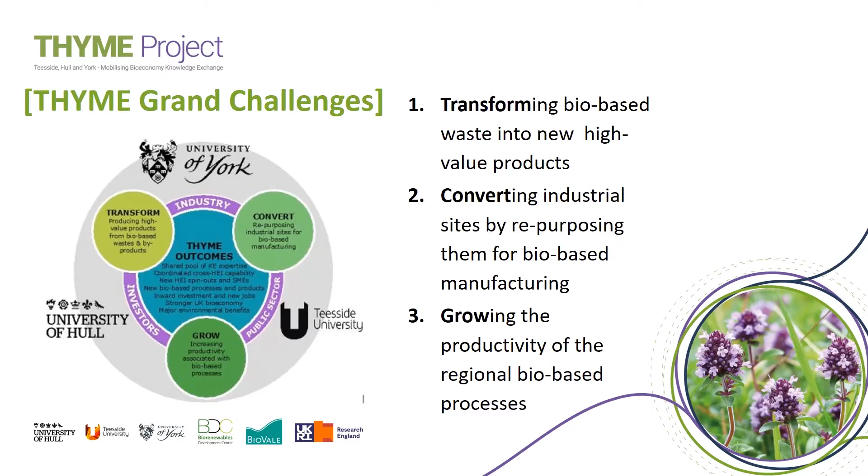And the challenges that the programme sets out to address are as follows. Challenge number one is transforming bio-based waste into new high-value products. Number two is converting industrial sites by repurposing them for bio-based manufacture. And the third one is growing the productivity of the regional bio-based processes.

So the purpose of the webinar today is primarily knowledge exchange around the topic of sustainable wastewater treatment, and hopefully with a view to develop a network around this area if there's an appetite to do so. The talks today will focus on activity at very different technology readiness levels, and you'll see as we go through, around reducing energy and resources to process wastewater, around transforming waste from the water system into valuable products, and also improving the productivity of wastewater processes.

Just a quick preview of the programme. Obviously, I'm the chair today from the University of Hull. I'll shortly be inviting Jill Mooney from Catch to give an intro into the work of Catch and different opportunities to engage with the group. And then there'll be 5 talks from across the THYME partnership. And again, you'll see as we go through, there are different technologies, different readiness levels, etc. But hopefully they'll all be engaging for you. And then right at the end, we're going to have a Q&A session.

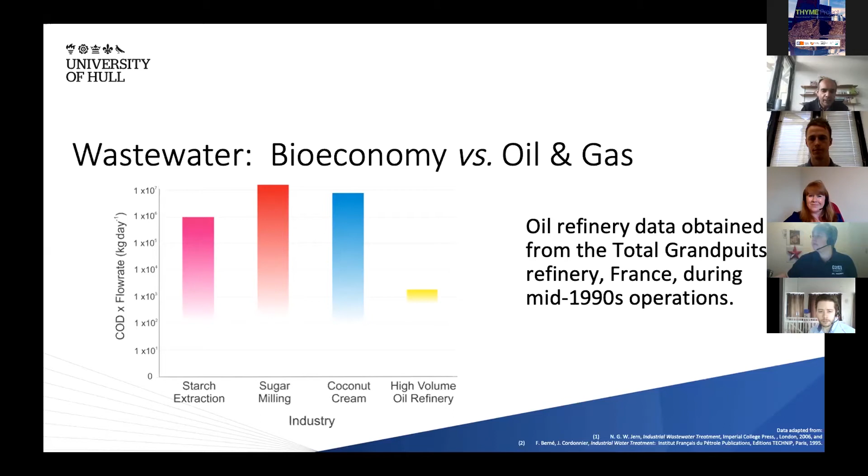So I'm going to hand you over to Adam, who's going to talk to you about Centrica Storage Ltd and potential issues that they face with their produced water. Yeah, thank you, Jay. So good morning, everyone. Just to give you a bit of background on Centrica Storage, if you haven't heard of us, we are an oil and gas operator with our head offices in Hull.

And both of these assets have to deal with wastewater. Both of them have challenges in processing that. So I think if we go to the next slide, there's a bit more, yeah.

The offshore assets were built 25 years ago, kind of old historic tech, most of it quite basic, quite simple. The produced water comes from the gas streams, which are quite hot underground. As you bring them up, they cool, and you get dropout of condensed water. These then go through a number of knockout vessels, and then finally the last stage is a filter. This filter is there basically to take any hydrocarbons or benzenes or nasties down to around 30 parts per million before the water is put back into the sea.

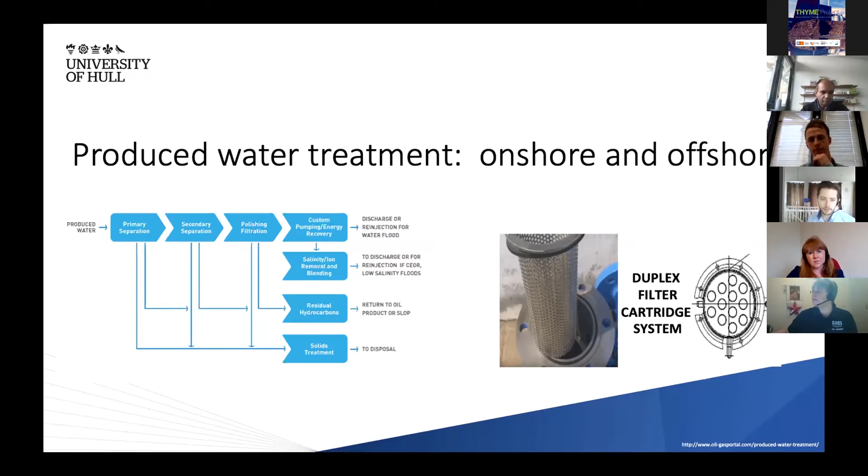Okay, so we engaged with Centrica Storage Ltd, and they explained their problem to us. They invited us to their facilities so that we could realise the scale and magnitude and identify those issues on site as well. We proposed a plan of work in which we could use some of the university's experience and expertise, particularly in the electrification of technology, to overcome some of the issues that Adam has mentioned, and develop this as part of a Knowledge Transfer Partnership, a part UK government sponsored initiative that encourages this collaboration with industry.

The KTP is a partnership between the industry partner and the university that the government helps to fund. In the case of a large organisation, 50% of the funding comes from government. In the case of a small or medium enterprise, something like 67 to 75% of the funding comes from government. The purpose of this project is to cement the collaboration through a transferable person known as the KTP associate, who happens to be a recent graduate. This graduate is supervised by both sides so that industry and academia can converge on providing a real and tangible solution to the industrial problem.

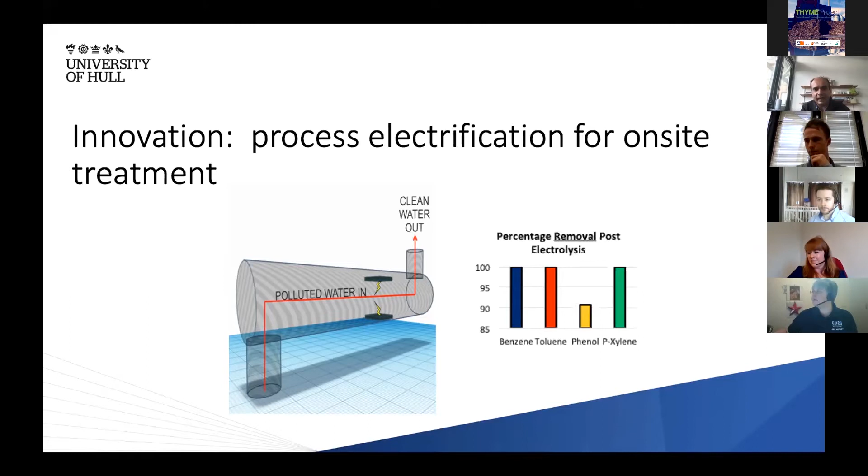And we're doing this not on the university campus, but rather at the university's Aura Innovation Centre, where Catch also have facilities. This low carbon centre allows us to have workshop facilities to do the research and testing that we need to actually develop and deliver on this particular project. So it brings the skills, knowledge and expertise needed, and it's a real benefit that it's located just a stone's throw, would you say, Adam, from your offices at Woodland House, on the same campus.

So thank you so much. Just want to say that if any of you are interested in applying for a KTP, we have an amount of expertise at the university. You can feel free to get in touch with Yosina or Tracy, or even me. We'll put you in touch with the relevant person. Thank you.

I'll pass you over to Jenny. Hi there. Thank you very much for that. I was just reflecting actually that the power of this sort of, it's not just funding, but this targeted support and the way in which it can unlock these collaborations and to answer real world problems. I think it's really exciting. And I must apologise to Reese because I referred to you as a student, and I should know better because I used to be a KTP associate myself many years ago. So no, but that's great.

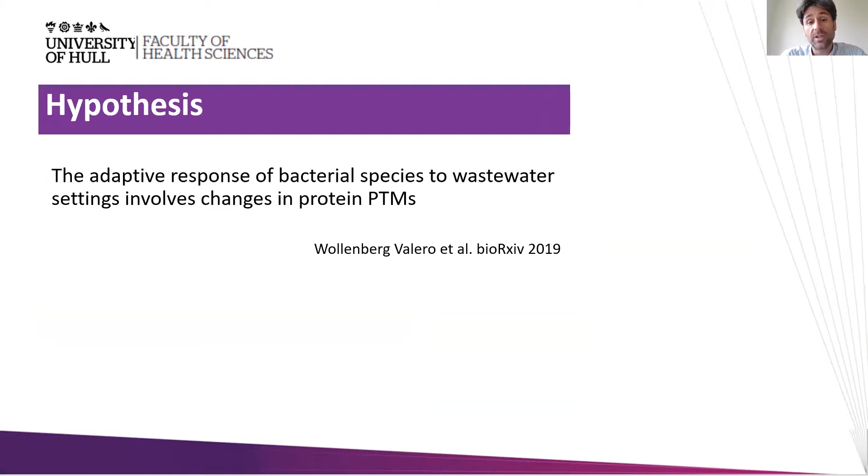So the hypothesis, which is underlying this project, is that bacterial proteins change their PTMs, change their modifications to adapt to the wastewater treatment environment. And this is based on some preliminary data that we published last year as preprint. The opportunity that we identified was to target that third THYME grand challenge that Jenny has mentioned before. And in particular, a research question is, can bacterial PTMs be useful biomarkers of wastewater treatment efficiency?

We haven't done any wet lab analysis. We haven't collected wet samples. We have used an alternative approach, which is known as proteomic data mining.

So we have used proteomic data publicly available in PRIDE, the Proteomics Identifications database. That is a database which captures all proteomics data that researchers produce, all those raw files, all those raw data, or not all, but if it's a decent study, they are deposited in these public repositories. And then we can go with a different research question and interrogate, investigate those raw data to try and answer the question that we are interested in.

And again, I've got an analogy to try and explain the methodology if you're interested, but as I said, I'm not going to explain that here because I only have 7 minutes left. But if you're interested, I can expand on that.

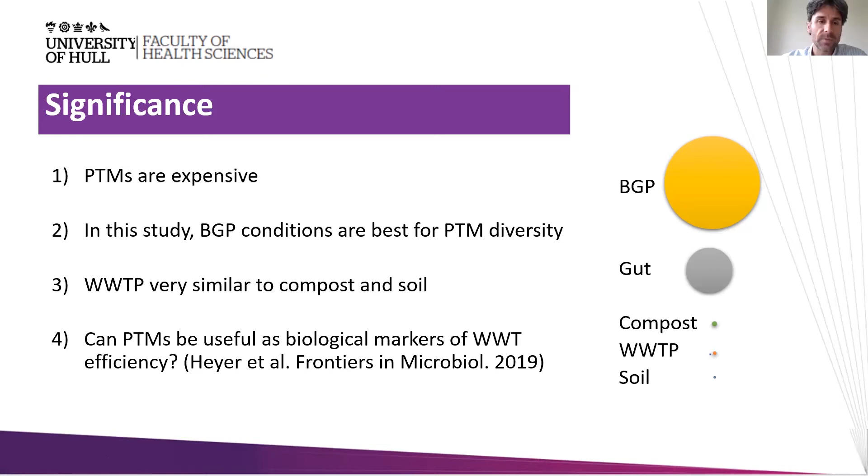We are going a step forward and proposing to use PTMs. So I hope I've convinced you that we are developing an original idea to measure wastewater treatment efficiency based on those PTMs. It is good value for money in the sense that we had a small grant, only £2,000, and we have generated gigas of data using proteomic data mining.

And we want to develop that into NERC and BBSRC grant applications to understand if these PTMs can be the biomarkers of those wastewater treatment plants that we are looking for. So I'm going to stop there.

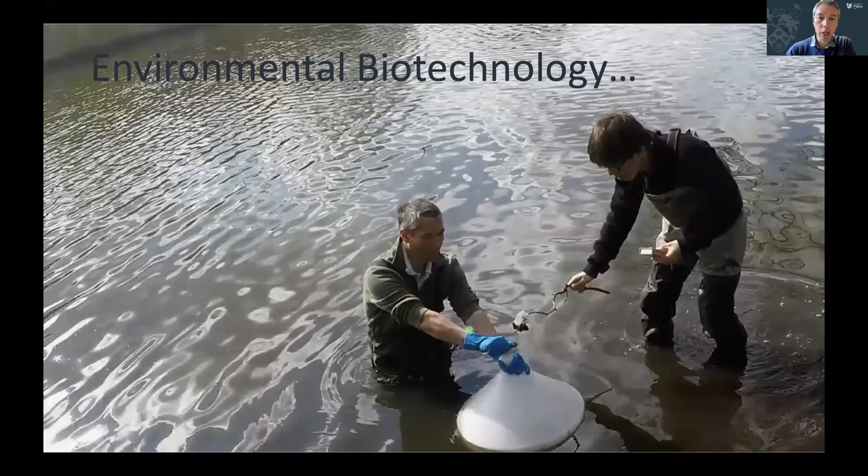So as Jenny said, I'm going to cover a couple of projects that THYME has supported that I've been involved with. Okay, so this is the process that we're interested in, the production of biogas from organic waste. That's a microbially based process. Basically it takes long molecules, they're broken down by different parts of the microbial community into smaller molecules, which ultimately result in the generation of biogas, which is a mixture of methane and carbon dioxide. Generally, just over half of it's methane and most of the balance is carbon dioxide.

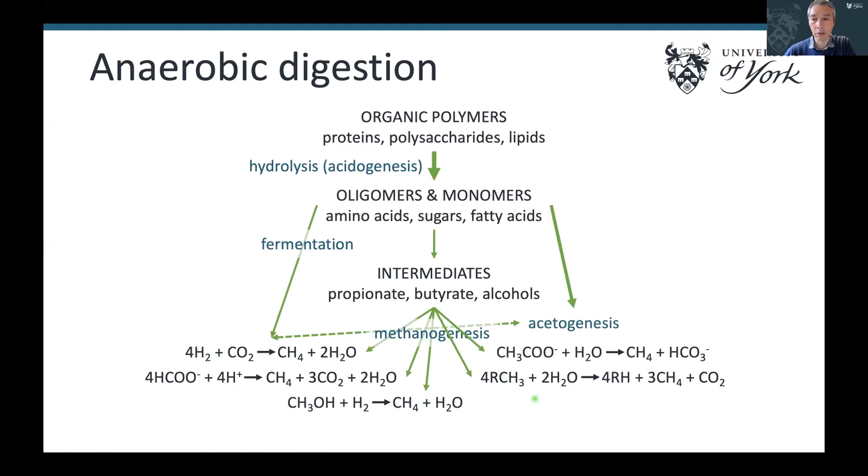And there's some interesting unique biochemistry that goes on by a group of microorganisms called methanogens, which can use a variety of interesting pathways to make methane. Okay, and we can harness that process, and we do harness that process in domestic wastewater treatment.

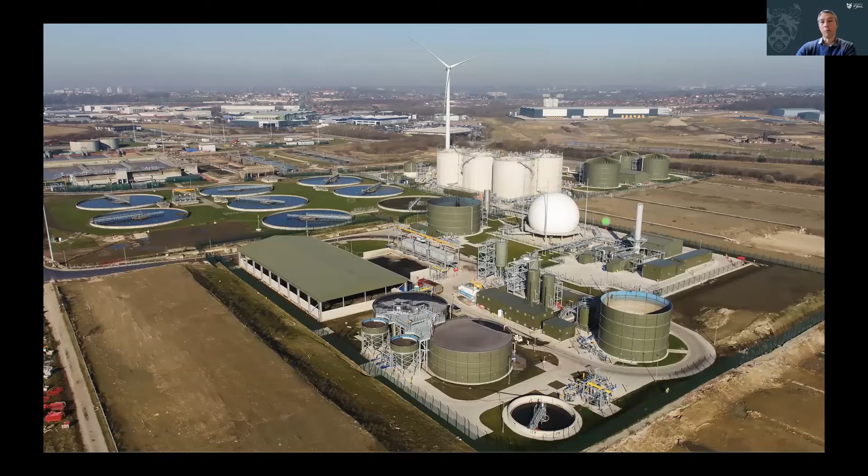So here you can see an overview of Yorkshire Water's Knostrop site, and in the background, these 4 white tanks are used for anaerobic digestion at a scale of 7.5 million litres per tank to produce biogas, which is then collected into this bubble and used for running a combined heat and power engine, so both producing electricity and heat.

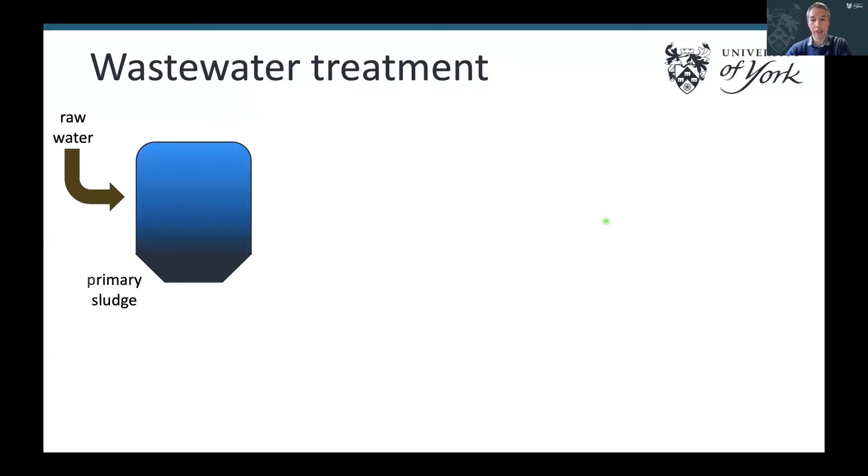Okay, so for those of you that are not aficionados of domestic wastewater treatment, the way this works is the water comes onto site, it goes into a settlement tank where the primary solids are allowed to settle out. That dirty water is then decanted into a second tank, which is aerated. That also removes a lot of the organics using an aerobic microbiology process, and those microbes form biomass which can also settle out, and they form what's called a secondary sludge.

Just as an aside, the air that we blow into those systems uses 1% of all the electricity that's consumed in the UK, so this is a fairly energy intensive process. The clean water from this process is decanted again into a trickle bed filter, more microbes involved at this point to really polish that water and get rid of any straggling organic molecules that can be removed.

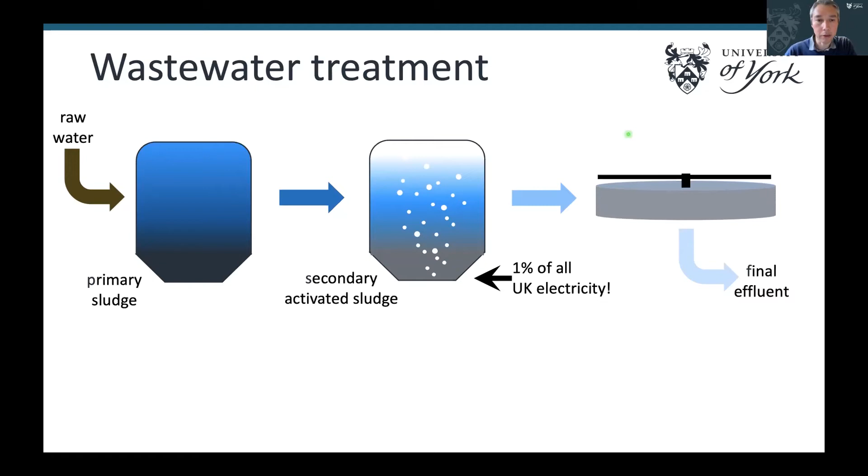And then the water that remains, the final effluent, is decanted out, normally into the river discharge. And that water is cleaner than the water that is abstracted upstream to make drinking water in the first process. So both the primary sludge and secondary activated sludge are collected, and they're put into an anaerobic digester, which is the main interest in my group. This also contains a microbial community that produces biogas and a digestate, which is nitrogen rich and can be used potentially as a fertilizer.

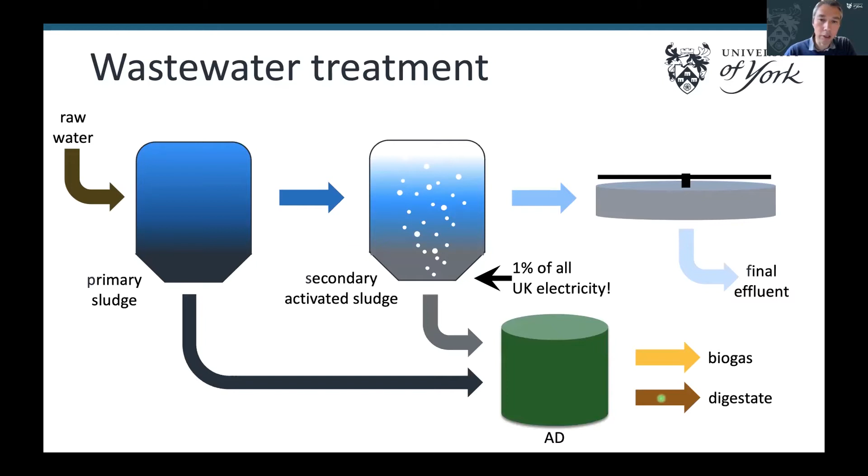Okay, so in order to understand this biology, we have collected a number of samples from around the Yorkshire region, going to Yorkshire Water sites. We've used DNA sequencing rather than looking at proteins, as Pedro was talking about, or PTMs.

And based on DNA sequencing, we can see that there's a large variation in the number of organisms that are found within anaerobic digesters. The population within the digesters is different to the population that's found in the material going into the digesters, and the digesters themselves vary depending on how the material is treated before it goes into the digester.

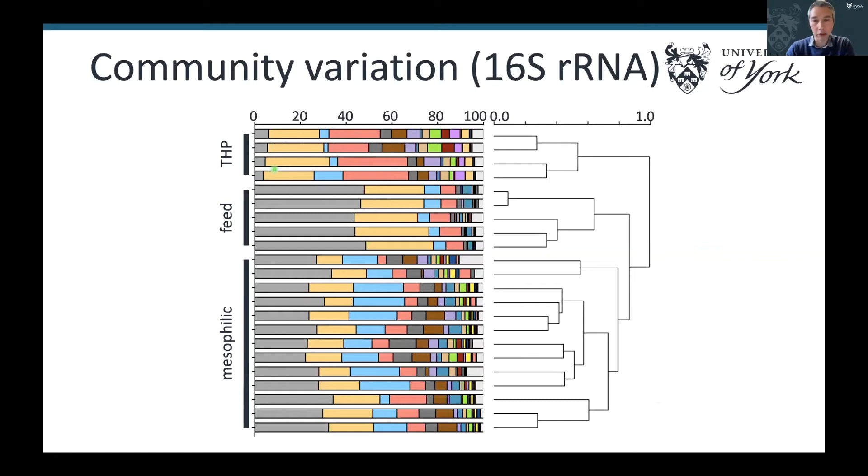So the first project that we were involved with that has had THYME support is led by Caroline Orr at the University of Teesside, and involves her collaborator Helen Carney. It also involved the Biorenewables Development Centre, which is based in York, and industrial partners, Northumbrian Water, who were interested in whether we could use these molecular techniques to improve the efficiency of their AD processes.

So basically, the proposal was Northumbrian Water run 2 anaerobic digestion sites, one at Bran Sands and one at Howdon. Their material is heat treated before it goes into the anaerobic digesters, and the reason for doing that is to try and break down particularly the microbes in the secondary sludge, which tend to be rather difficult to access for anaerobic digestion.

So Caroline proposed that Northumbrian take samples of the material coming into the sites, the material after it was heat treated by the Cambi process, and then from the 3 digesters that were receiving that material. And those samples were taken once a month over 5 months in the summer of 2019 from both sites. And the reason for looking at both sites is because they perform differently, even though theoretically they're running exactly the same process.

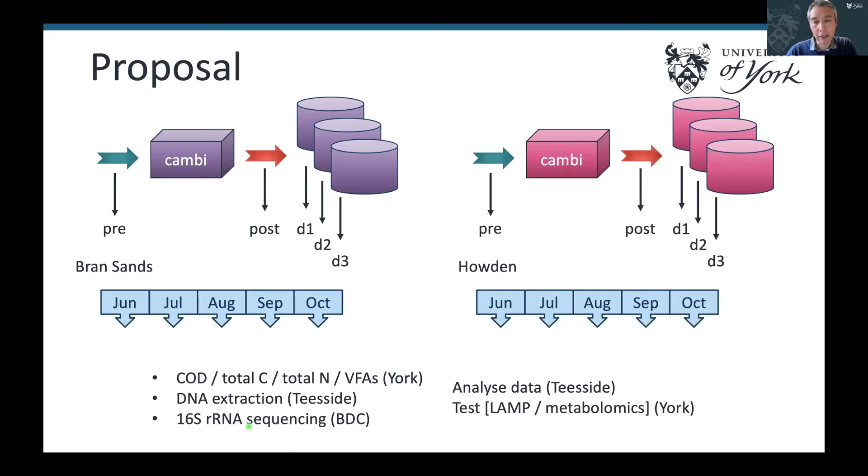Okay, so the samples were all collected very successfully and distributed, and then before they were completely analysed, coronavirus hit. So we're not at the end of this project quite yet. We're still analysing some of the data, but I can give you a brief taster of the kind of things that we've managed to collect so far.

One of the other technologies that we're looking at is an assay that we developed for another project. This is a LAMP assay, so a very rapid, potentially colorimetric assay that tells us about the specific presence and absence of particular species within any sample, but in our case, within anaerobic digesters.

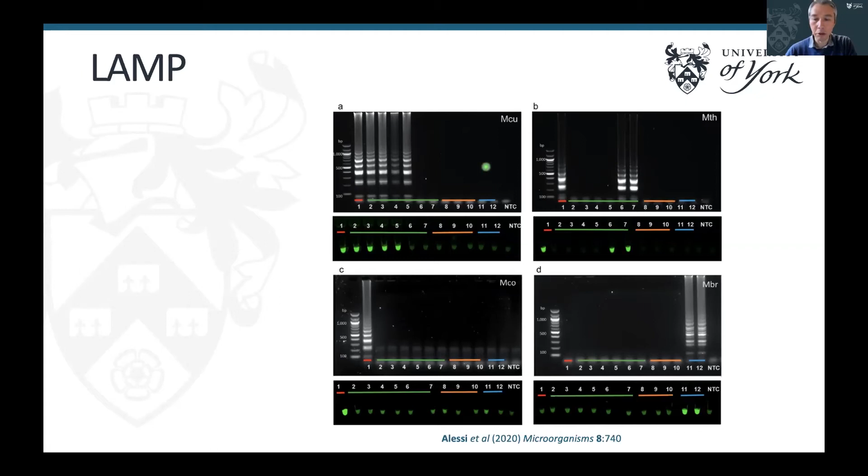We had developed this to follow specifically the methane-producing organisms in another project that we ran with the University of Southampton, which is to do with biogas upgrading. I can't go into details here, but basically the idea is that you can take renewable electricity, use that to make hydrogen, which is very difficult to store,

but then feed the hydrogen into digesters, and the microbes will adjust to that and combine the carbon dioxide and hydrogen that you're injecting to make methane. So instead of getting the typical 55 to 60% methane, you end up with 95% or better methane coming out of the system.

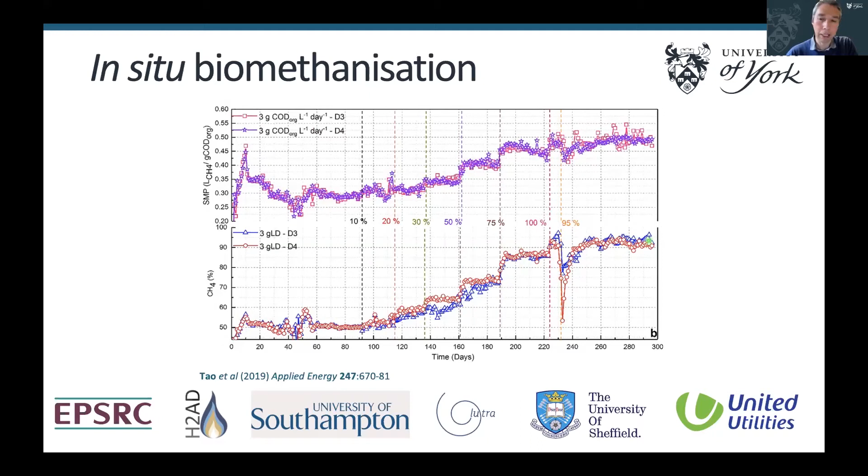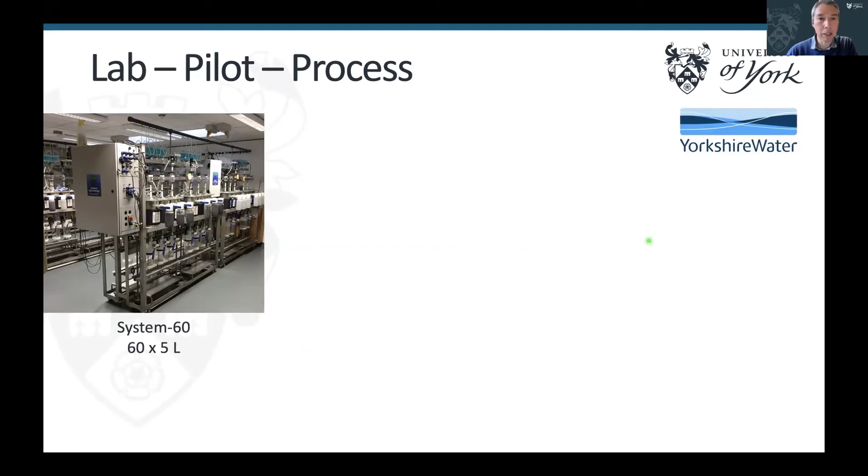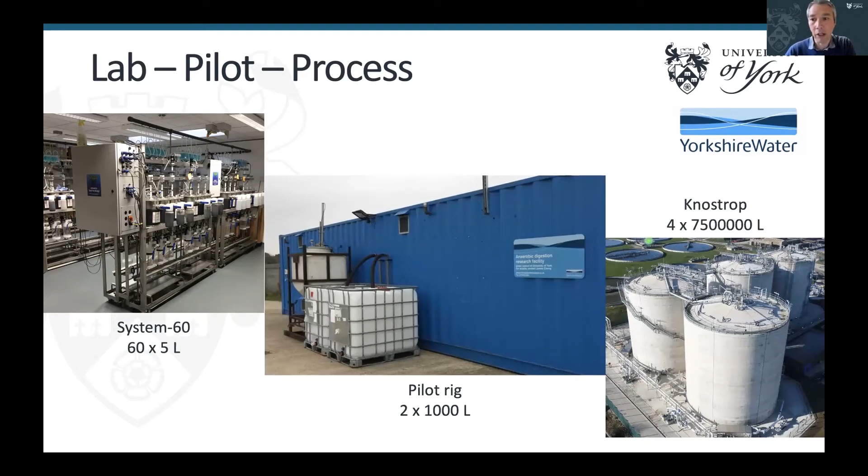Right, so doing those projects highlighted a challenge to us, which is we do most of our experiments in the lab, and this is the facilities at the University of York, which have been sponsored by Yorkshire Water. We have 60 5-litre digesters where we can do experiments. Yorkshire Water also have a pilot rig, which allows us to scale up from 5 litres to 1,000 litres. But obviously there's still an enormous step getting up to process scale, which, you know, in Yorkshire Water's largest installations is 7.5 million litres.

So the second project that we have been involved with, sponsored by THYME, is to look at this idea of repurposing process scale assets to demonstrate AD innovations. This was done in collaboration with Peter Ball, who's a colleague in the management school at the University of York, Gary Montague at Teesside, Tom Taylor at Yorkshire Water, and actually most of the work was done by Nathan Innard, who worked for me at the University of York.

So the idea here is that as Yorkshire Water is updating its sites and rationalising processes, it's going to close some of its smaller AD sites. Normally those facilities would be decommissioned, and the question was whether any of those facilities would be suitable for demonstrating innovation, which would allow us to bridge the gap between pilot and process scale without any of the risk of just asking someone to make a change that looks like it works at small scale into a process plant, which obviously, you know, nobody wants to be responsible for losing sewage treatment facilities, for example, at Sheffield or somewhere else. It would not make us very popular.

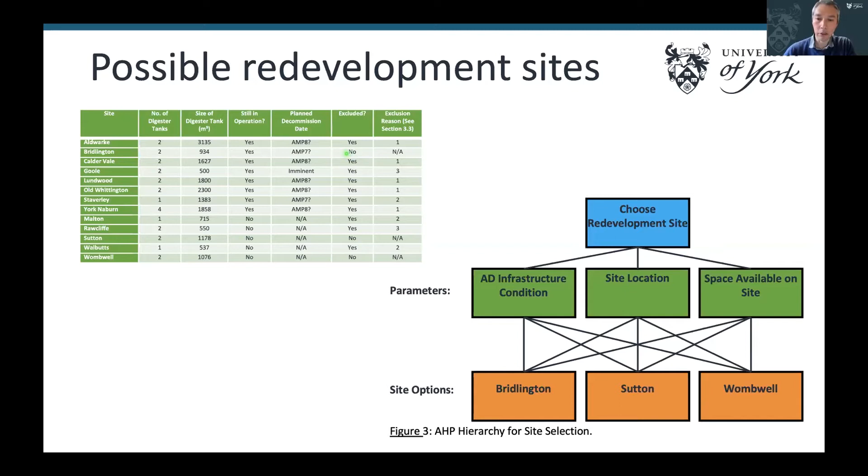Okay, so Nathan conducted a survey of potential assets that were being closed down. We applied a number of different criteria to work out which sites might be suitable based on the current state of repair of some of those assets, whether or not there were 2 or more digester tanks available so that we could do controlled experiments and actually demonstrate that our innovations were improving the process. And we basically narrowed it down to 3 potential sites, and then did some further work which allowed us to narrow it down to Bridlington.

So here you can see the Bridlington site. There are 2 anaerobic digesters, which are just under 1 million litres each, which is, again, a nice step up from 1,000 litres and brings us into the realms of process scale. And you can see there's plenty of room on this site potentially for redevelopment and for introducing plug and play type facilities so that other innovators could bring their equipment on site and we could introduce it into that AD process.

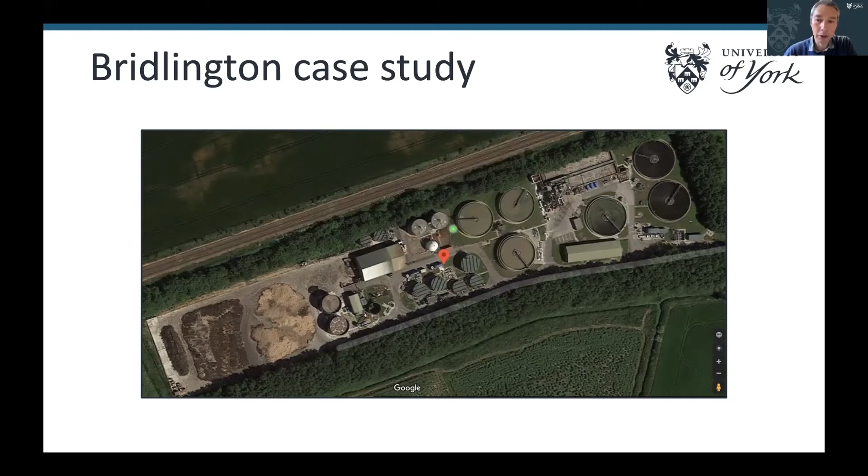We're in the very last stages of generating a report for this work that we've done through the THYME project. And the next step is obviously to source funds to try and actually realise some of these ambitions. We think we're going to be able to do this. 2 things have come out fairly recently. So Ofwat, the water regulator in the UK, has just established this £200 million innovation fund to try and encourage innovation within wastewater services within the UK.

And at the same time, all the water companies in the UK, which traditionally have, I guess, had a little bit of healthy competition and not wanted to therefore share necessarily the results of their innovation, have drafted this idea of innovating together, and core to that they have proposed a UK National Water Centre of Excellence, which they propose would be a virtual centre that could make use of facilities all across the UK for the kind of work that would allow people to innovate.

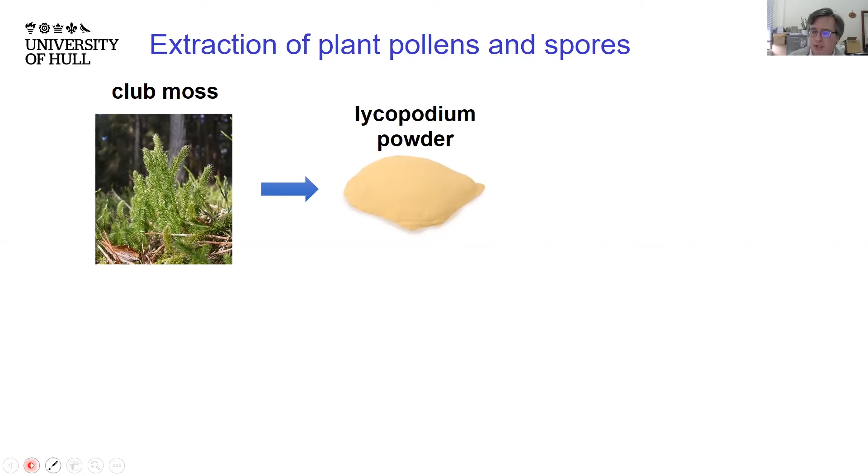Now, pollens and spores are of interest because they make up quite a lot of the bulk of organic matter which is found in the sediments in riverbeds, and materials are adsorbed onto this organic matter and then reside for quite a long time in the sediments. So we thought that we might be able to use this as a fine way of removing materials in a cost-effective way from wastewater.

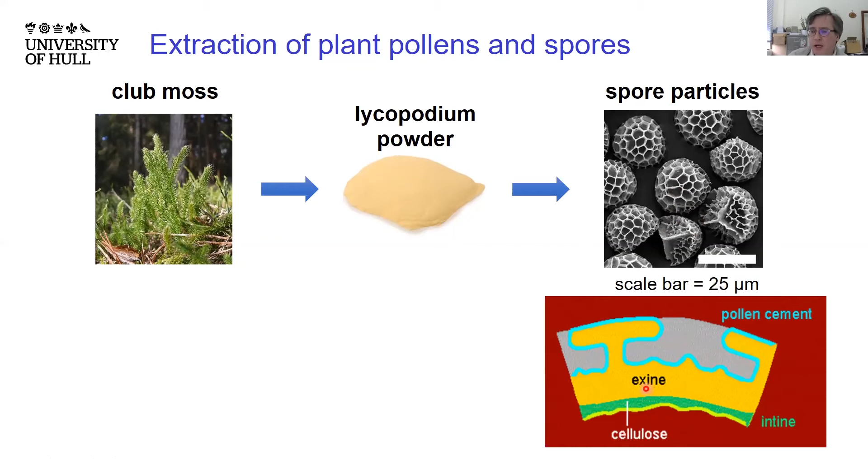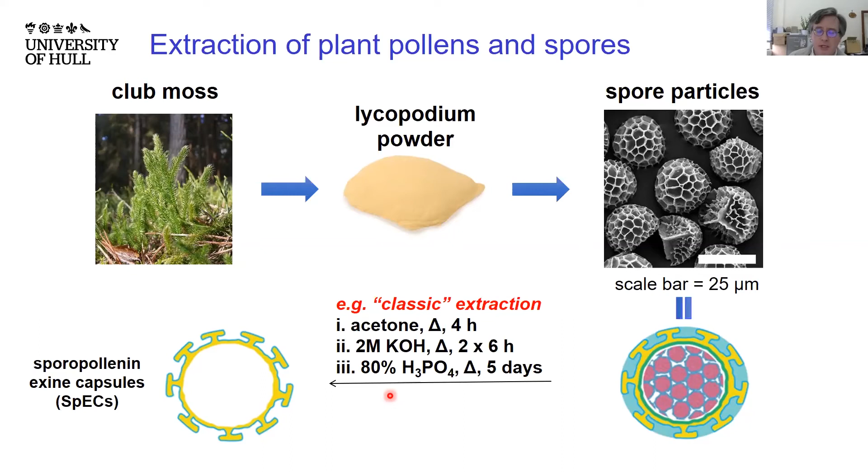They have narrow channels through them, so this is a cross section of one of the walls of those microcapsules, so material is able to be adsorbed and absorbed very readily. And also they have a range of chemical functional groups on the surface. And these mean that these particles are very amenable to a range of different modifications to tune them to adsorb different types of material.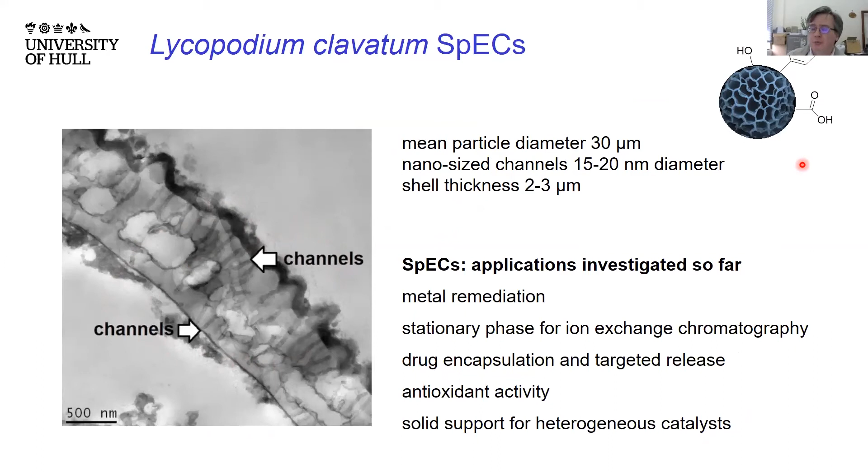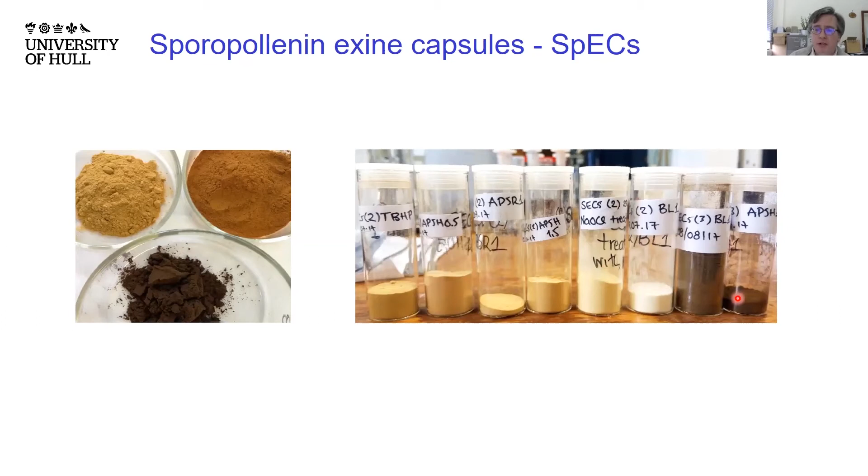So in this particular project, we have a range of materials. So you can see they're slightly different colors depending on what type of treatments that they've been through. But in some cases, they are more lipophilic. Other cases, they're more hydrophilic. And they have different abilities to adsorb materials which themselves might have different properties.

Now, one of the earliest pieces of work we did before even the Sullied Sediments work is illustrated in what happens when you take these particles and mix them with a commercial food oil. In this case, it's cod liver oil. And these particles are able to soak up the oils really, really efficiently. So here we've got some of the powder which has been mixed with oils ranging from a 1-to-1 weight ratio all the way through to a 6-to-1 weight ratio. The 6 is the oil and the 1 is the particles.

And you can see that 1-to-1, 1-to-2, 1-to-3, we still have a powdery type material. It gets a bit sticky at 4-to-1. So these particles are absorbing 4 times their weight in the hydrophobic oil before they then start becoming pastes and sort of like oily mixtures. So they are able to encapsulate a lot of this material.

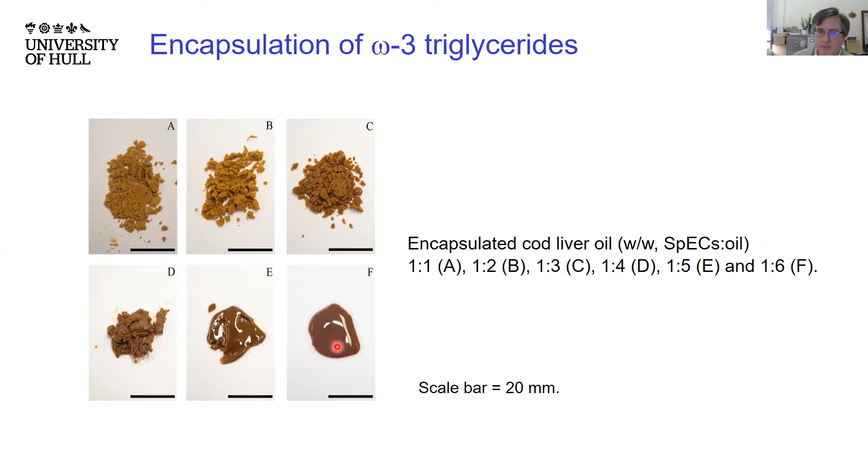And in fact, if you take an oil in water emulsion, add a few of these particles and mix it up, you'll find that that emulsion is broken and the particles will absorb those hydrophobic materials very readily. Now, for our Sullied Sediments program, which is funded by the EU, we were interested in the so-called watch list chemicals. And one I'm going to illustrate here that we looked at was triclosan, an antiseptic which is found in lots of creams, toothpaste and deodorants, although it's used less and less now.

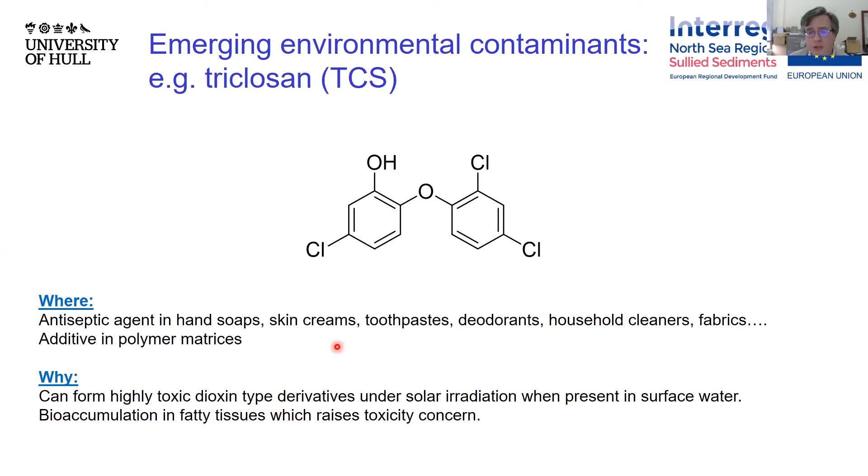So what we did was we've done some very early lab-based studies where we were comparing what happens if we take a solution of the material with some of our particles, just mix them and allow it to reach equilibrium. So we can measure what is stuck to the particles and then what is remaining in solution.

And so with the case of raw pollen, you see that with the amounts that we've carefully calculated so that we can observe what's going on here, after a few minutes we basically see an equilibrium being reached. In this case, just over 40% was adsorbed to the raw pollen, and 55 or 60% or so was remaining in solution.

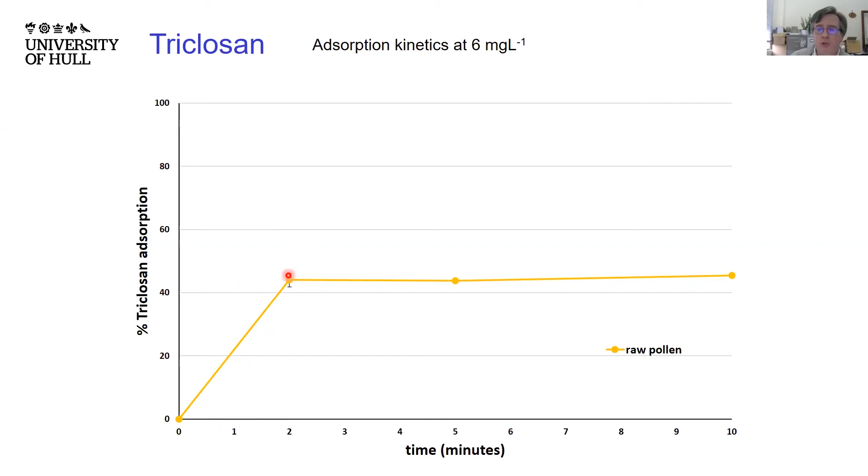But when we took our processed particles, where we have removed the inside, so we've got our exine capsules as we call them, the efficiency was much greater, so they were able to absorb much more at the same rate. And of course, this is a batch type process, so we wanted to think about what's happening when we do a filtration type process. So in this case, we made a packed bed and we're passing our solutions through the packed bed. And what we can see is we've got two different flow rates. It's the same experiment, same concentration.

I should say 10 milligrams per litre is vastly in excess of the levels that you'd actually see in polluted water, but it just makes our analysis a lot easier. You can see at the bottom left-hand side of the graph, when we're passing material through, we're basically not seeing any of the triclosan being eluted, telling us that it's being adsorbed to our particles. And then the breakthrough occurs after about 160 to 175 millilitres, where we then slowly see the concentration increasing.

But even after passing through quite a large amount of solvent, with a packed bed of maybe about a quarter of a centimetre, so actually a very small amount, we never got to the point where the concentration of the solution coming off was the same as what we put in. And we were able to then calculate a capacity of our material to adsorb the triclosan.

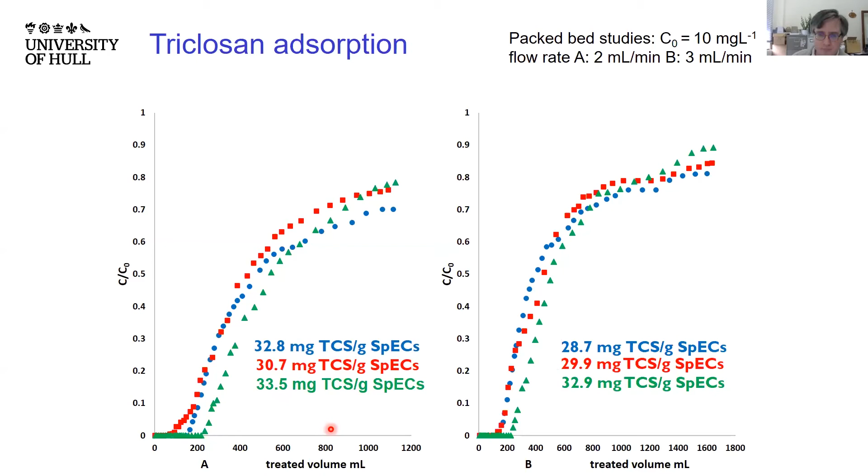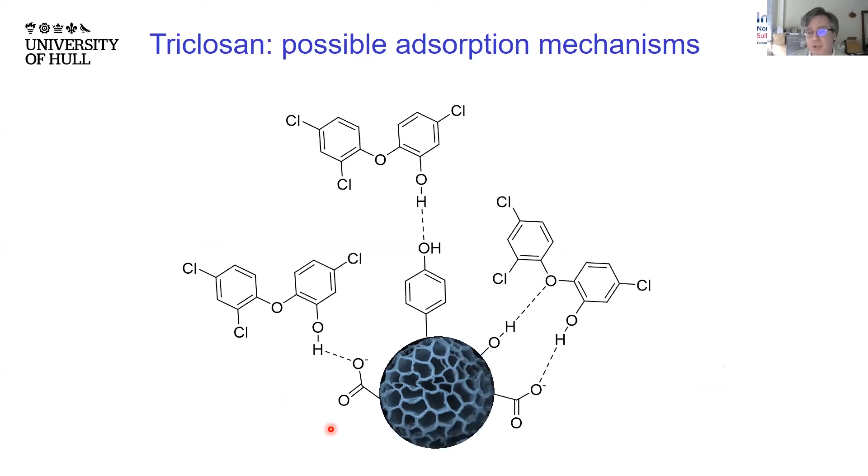How does it work? Well, we can postulate about the type of interactions for any particular individual molecule which might make them be adsorbed onto the particles. So there'll be hydrophobic and hydrophilic type interactions. But the main thing here is we can engineer these particles to try to adsorb materials of different polarities.

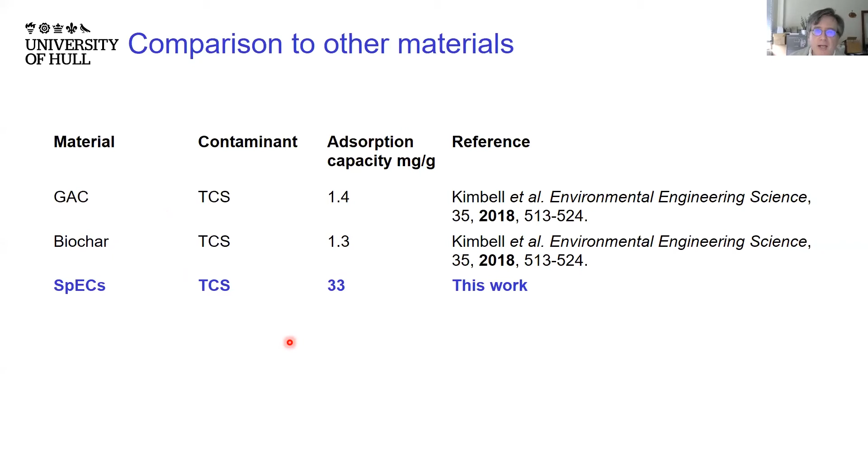There are in fact a range of other things we've looked at, different types of spore or pollen capsules. We've looked at different types of materials. Some are better, some are worse. We've done some work, not yet complete, with Yorkshire Water and Northumbrian Water about what happens when we use real-life water coming from the wastewater treatment plant, and also what happens when these particles go through an anaerobic digester. Very interesting to hear James's talk earlier.

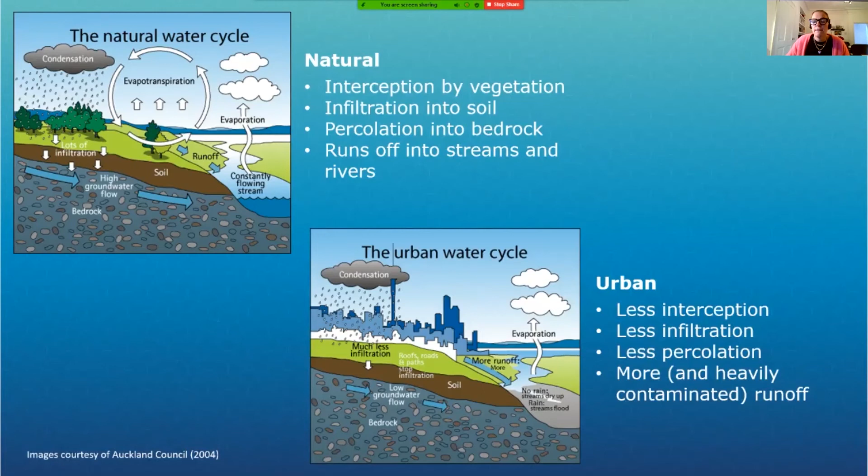And as the demand for housing increases, that places increasing demand on land. And so more and more developers are looking at and are given permission to build on floodplains. So we have some real issues with properties being at risk from flood right at the start of them being developed. So we need a system that moves us back from this urban water cycle towards this more natural water cycle. And that's where SuDS and natural flood management comes in.

So what are SuDS? SuDS originally stood for Sustainable Urban Drainage, but the urban has been kind of dropped, but it's been retained for the purpose of the acronym so that it's easier to say. But essentially, it's an approach to managing rainfall that replicates natural drainage, back to those pictures that we just looked at, away from that urban water cycle and more back towards a natural cycle.

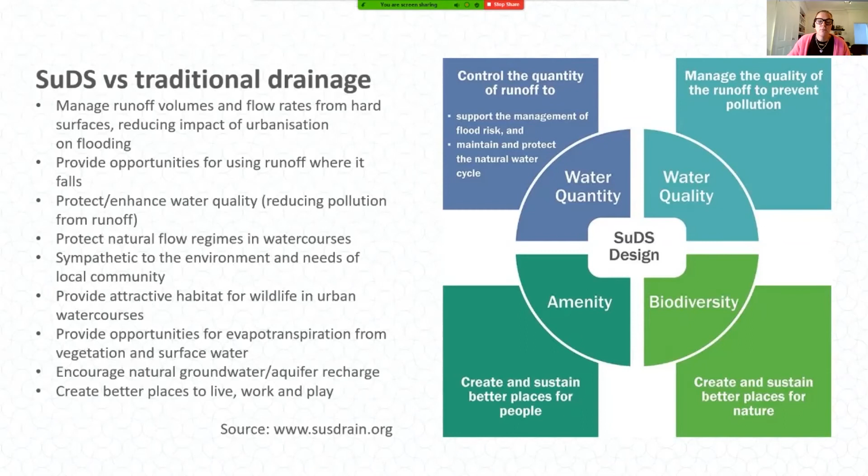So when it comes to sustainable wastewater treatment, SuDS can play a key role, particularly in relation to water quantity. So that's slowing the flow of the wastewater to reduce flooding and the speed that it re-enters the watercourse, but also water quality. And both of these, as I say, can lead to improved environs and biodiversity.

So picking up particularly there on the water quality management benefits, and from some of the presentations we've heard today, in common with how we've interrupted the natural water cycle building our urban environments, so too our activities, as we've very much seen from the previous presentation, lead to numerous pollutants entering the water cycle.

This wouldn't be managed by the traditional pipe drainage system, and those pollutants or contaminants can wash down into the sewers and into the watercourses, and as we've seen, end up in sediment in the riverbeds, and obviously the water quality suffers as a result. SuDS can provide a means of bioretention, so removing these pollutants and managing and treating that runoff.

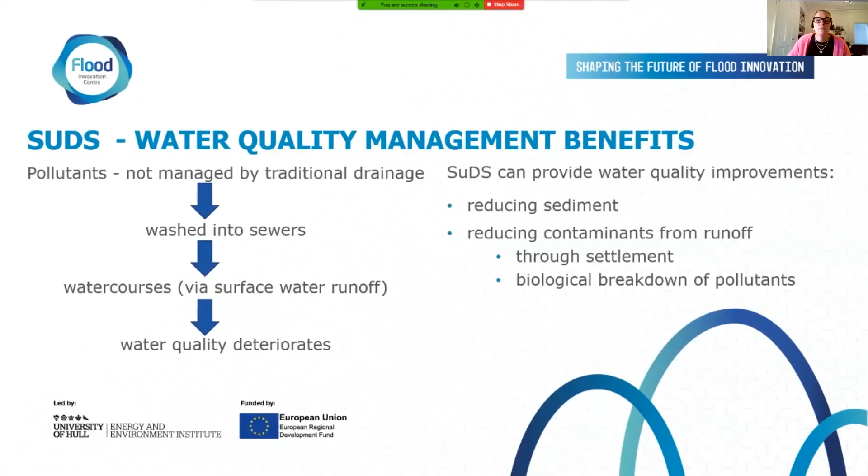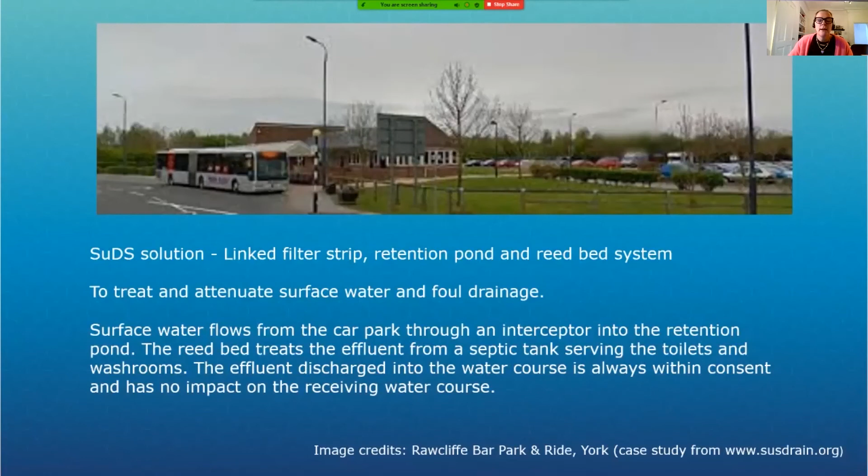Another area that we're working on, and this is with Jenny's project THYME, is looking at how soil resilience can play a role in water treatment and flood resilience. So this is a project that THYME are working on, and we're having some involvement with that: improving soil resilience to climate change.

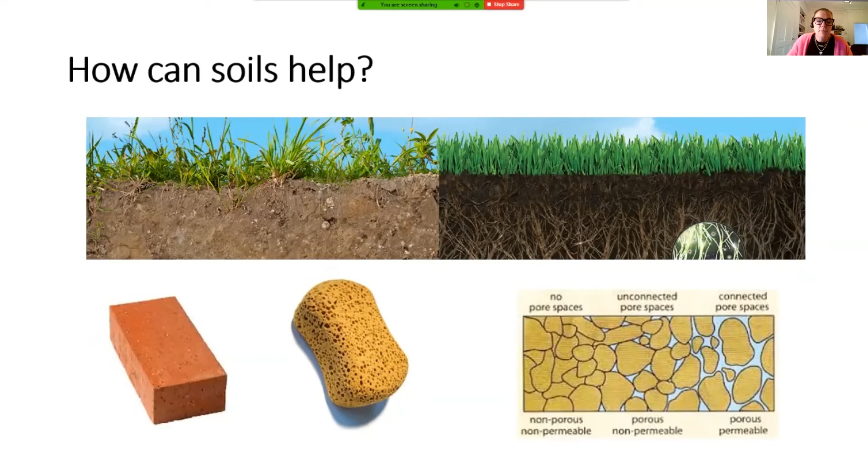So a couple of examples there of the types of projects that we could work on, a bit of a whistle-stop fly-through of how the Flood Innovation Centre might be able to help in this space.